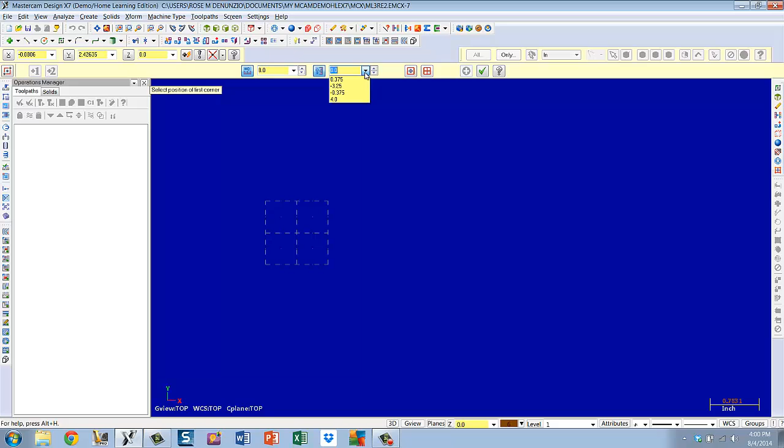So first we'll start with the large rectangle, which is 8 by negative 3.25 in the Y. So we go to our create rectangle, and it's 8 by negative 3 1/4 in the Y. Enter. Here's our phantom, and we are going to place that right on the origin as depicted in our print.

We can do a fit then, and mouse wheel it down. There's another rectangle. I would advise making it the entire distance of the part, because we can use the remainder of that distance to parallel from.

So in that sense, and this is exactly how we did it in tutorial 2, we want to create another rectangle. First I will apply this large one.

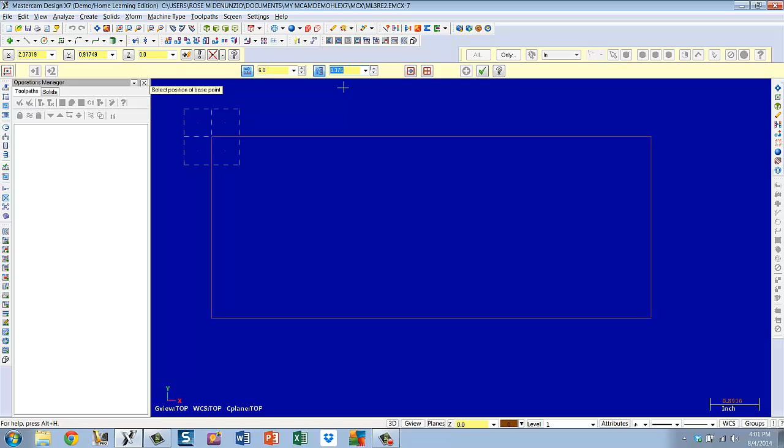My next rectangle is going to be 6 inches in length, and it's only going to be a full shaft diameter of 750, so we're going to make half of that because of our revolving. So it's going to be 375 in width, and we'll go ahead and hit enter to get that phantom. It looks right because basically it's half of our shaft.

And then I'm going to go up to fast point. We have a print dimension of 1 in the X in terms of location, and in the Y, as I instructed earlier, to go ahead and calculate the Y location of that center line, and it is negative 1.625. I wrote that right on the print.

I'll use it again when I put my hole in, and I'm going to use it for the axis to rotate my part around. So that looks good. Basically it's placed on the center line. If you just hover on these, you can see those are your center points, and that it does align with those. So that looks like it for rectangles.

I'm going to check out of that command. Now I'm going to start putting in parallel lines. I'm going to start with the vertical ones because they look like they'll give me the most pictorial value to help me build my part visually.

We're going to go to parallel lines. I am instructed to select a line. I'm going to parallel off of this line. My amount will be from print 3.625, enter, and then it says indicate the offset direction. It is this direction. I'm going to accept it, but stay in the command.

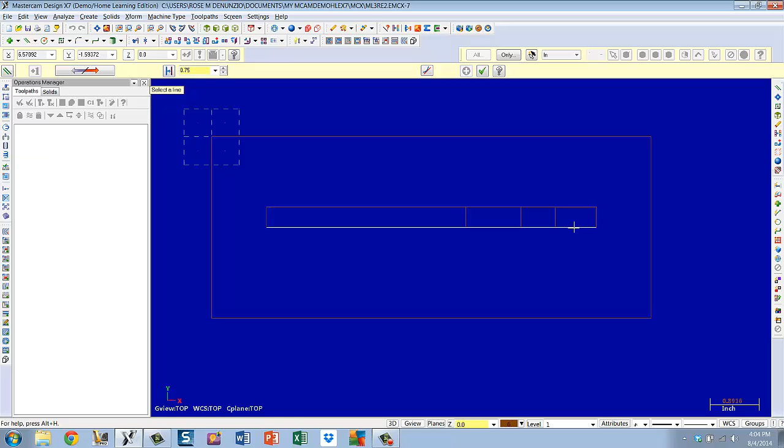It looks as though I've only got 2 of them. We're going to come off the center point of the part. That's where everything's dimensioned. My distance, if I'm going to do the head right now, it's 1 1/4 inches in diameter, but that's divided by 2.

0.625, that's 5/8. The offset direction is here. Now I just put in the edge of the head. I'm going to accept that one. And then I've got another one that is the flat shoulder.

It's 1 inch in diameter, so select the line, indicate the offset distance, which is 0.5, enter, and now indicate my offset direction. I believe that's it for parallel lines, so I'm going to exit out of that command.

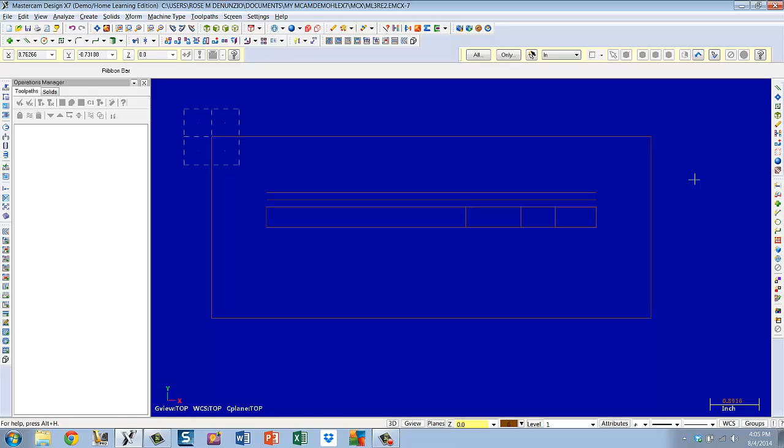Now I'm going to start to draw my part through trim and extend as much as possible at this point. You can go to the scissors. I'm just going to use the trim one entity. This will also extend, so if I say I want this line to go all the way up to here, it'll do so. This is the other end of my head, so this line needs to trim and or extend up to this line. I don't need any more of this, so I'm going to keep this much to here.

This line has nothing to do with the head, so I'm going to trim that out just so I can see it better. We'll keep this line to here for now. And we'll keep this line to here for now. So I've got my head, and then I've got my next shoulder drawn in.

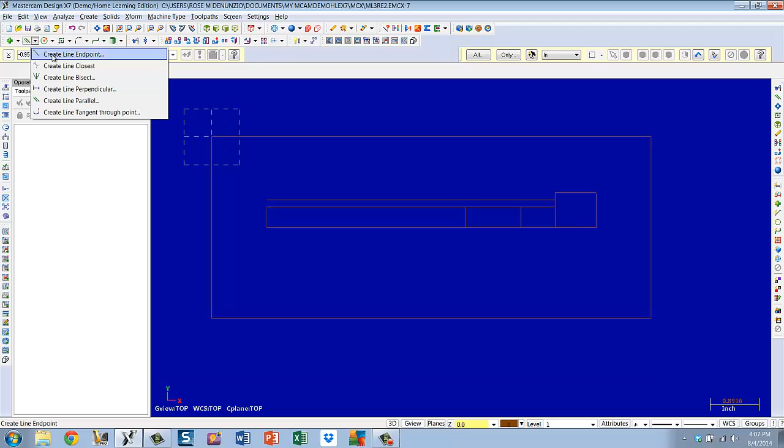At this point I may want to put my angular lines in now, so I'll check out of that and go to just create line endpoint. I'll look at that 45-degree angle I need to put in, sort of a chamfer.

Specify my first endpoint, which is here. It's not going to be tangent, horizontal, or vertical. It's going to be an angular line. 0 degrees starts at 3 o'clock, 90 degrees is at 12, 180 is at 9, and we need another 45. So 180 plus 45 is 225, enter. And all I really need to do is place it across my intersection, which should be this line.

That looks good. I'm going to apply that, but stay in the command. And I've got a 7-degree line to put in, so I'm going to change to 7 degrees, and specify my first endpoint.

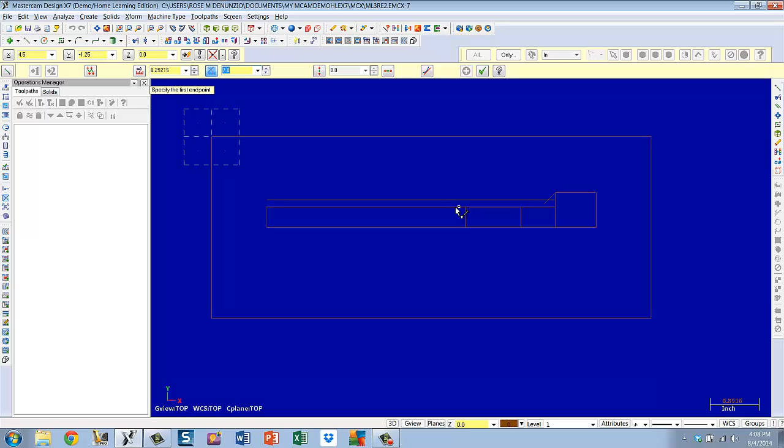If I look at my print, it's at this shoulder here. 7 degrees right off the 3 o'clock, so I'm good. All I need to do is cross my intersecting line, put my 7 back in because it didn't hold, and I'll just back it up to where I cross my intersection, which is there. And that's good for my line endpoints.

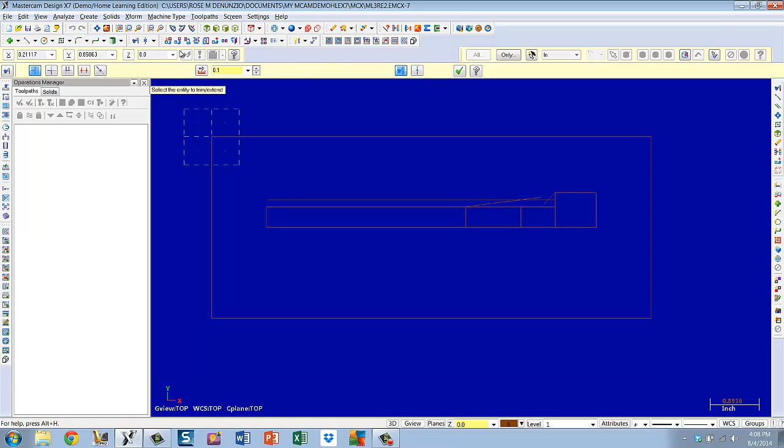Now I can trim some more. Pick the scissors. I only need the 7 degrees to go up to here. I only need this line to go to the angle line.

I want to trim this line. I want to keep this to the 7 degrees. The 45 I want to keep to this flat. I want to keep this flat to the 45. And I only need this shaft to here.

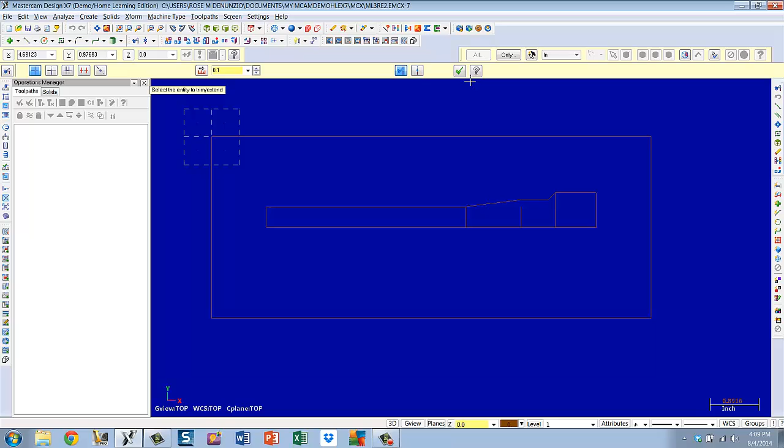That looks really good. Now I can delete all of these. You can either hit your delete button or the eraser.

And the last thing we need to do is put in our fillets, which are 0.0625 radius. So to put those in, we go to our fillet command, put in our radius 0.0625, and follow the prompt. Our drawing says we need a fillet at this corner and at this corner. Those look correct. I'm going to check out of that.

And the last piece of 2D geometry we need to put in is the hole. So we go to the Create Circle Center Point command, put in our diameter, which is 1/2 inch, enter.

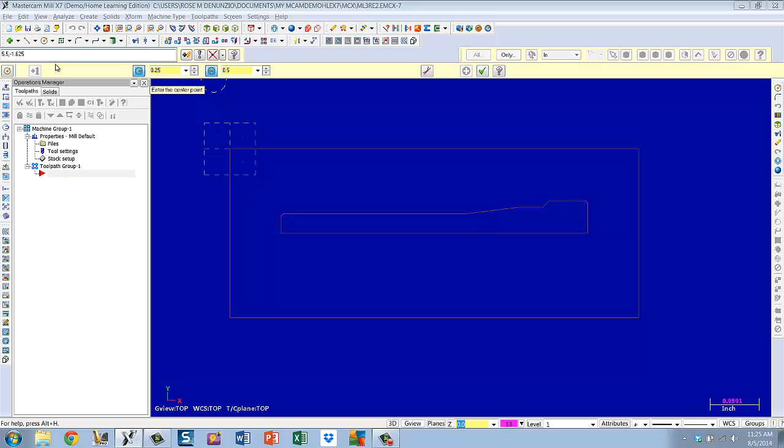We've got our phantom hole. Now we can place it through Fast Point by putting in the location. The X direction is right on the print, it's 5.5, comma, and it's right on the center line, which we've determined is negative 1.625 in the Y. Hit enter, and that hole is placed. And it looks correct according to our instructions.

So now we can go ahead and start creating surfaces and building the rest of the part from those. The first one we're going to do is the revolve.

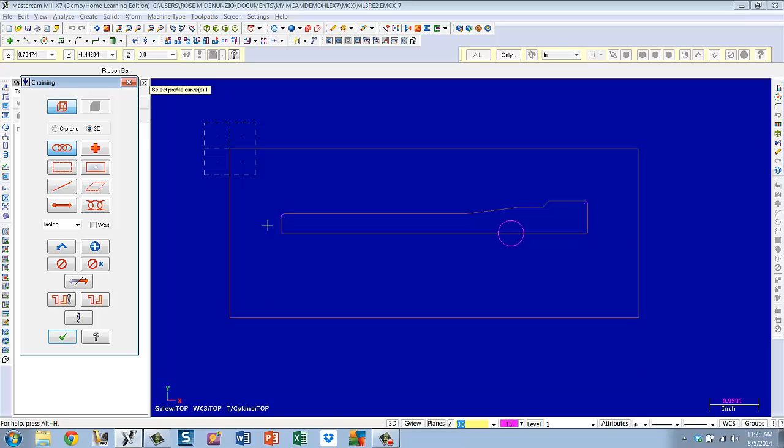Create, surface, revolved. Leave the chaining dialog box the way it is. Go up to our prompt. It says select a profile. So we will select the chain to begin here, go follow this profile, and we'll end it here, because we're not going to revolve this. This is simply our center line, and it's going to serve as an axis, which you'll see.

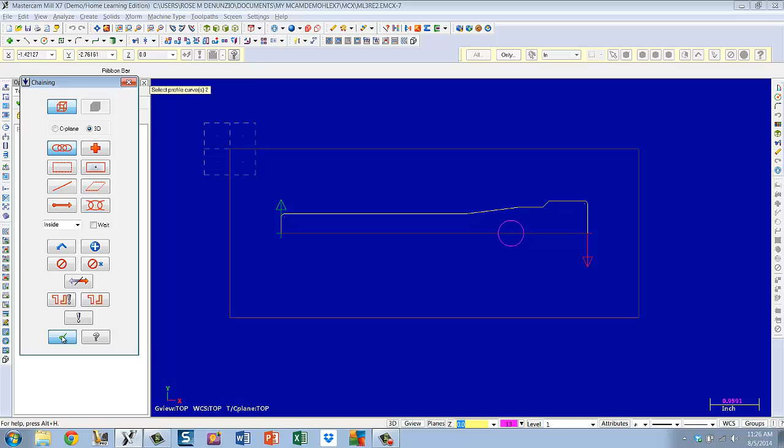So when I say OK to that profile, it says select the axis of rotation, which is this, and there we have our rotation. Go to isometric, and you'll see that it rotated the entire 360 degrees around. We really only need 180 degrees for this job. Hit enter, and it gave us the correct 180.

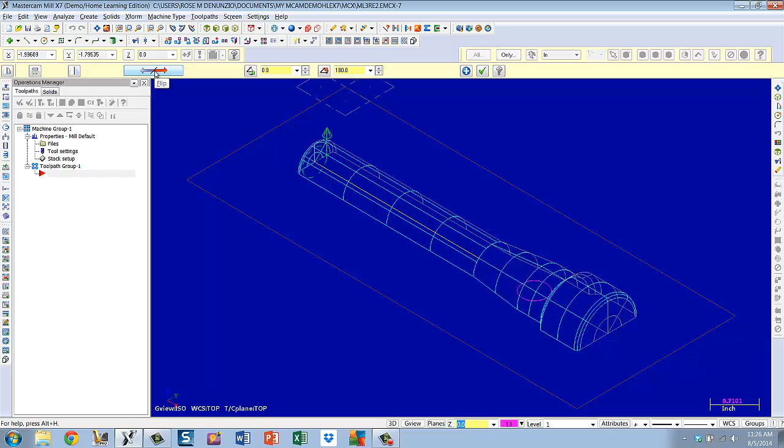I'm going to fit it. You can also use this flip button if it gave you the wrong one, but that's what we need. So now we're ready to move on to

the hole. We're going to place that hole onto the surface. So I'm going to go up to X-Form, Project. It says select entities to project. I'm going to pick this hole, hit enter or end selection. We want to move it, but we want to move it onto a surface, so we hit that icon.

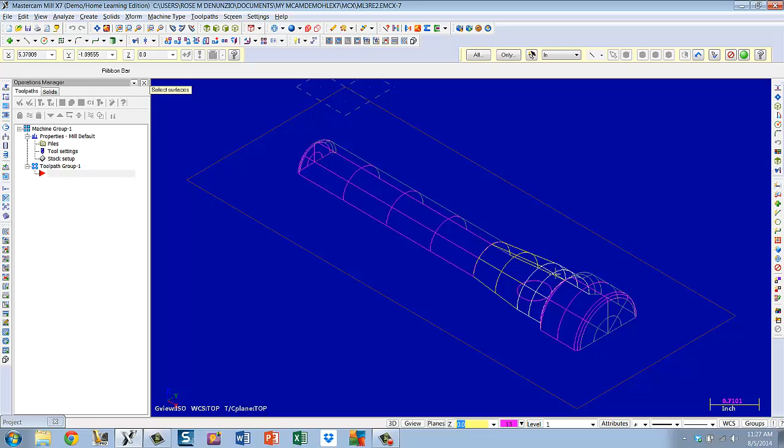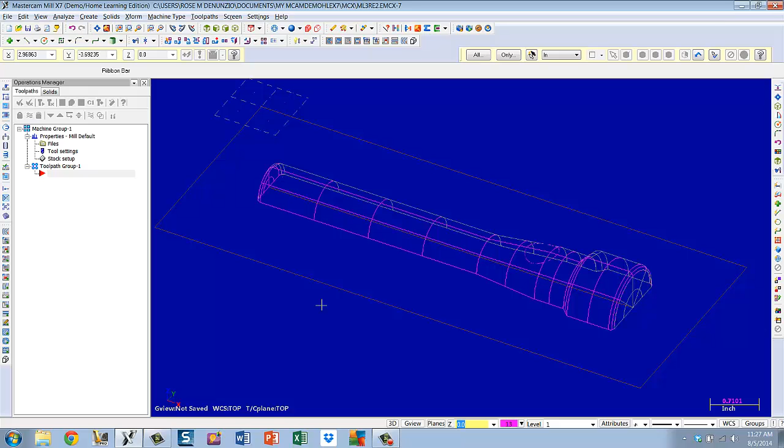Now we pick the surfaces as we are prompted. That one and that one. There's a little trick they threw us. We have two surfaces. End selection. And it looks like it projected very well. We don't want to join results because we need to use net later, and net needs the results not to be joined. It needs a minimum of 3 entities. So the rest of that box looks good. I'm going to say OK, and there's my hole projected onto the part.

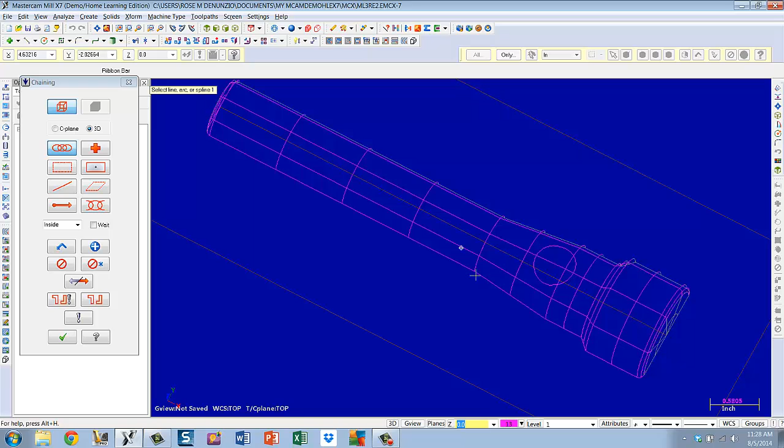Moving along with our instructions, we need to create a draft surface. Create surface, draft. We can leave chain on, but we're probably going to have 3 chains. I'm going to pick that one. Oh, it chained everything, but there's still 3 elements in there. Say OK.

According to the detailed drawing on the print, the depth is 0.125. Enter. The direction looks good. At an angle of 45 degrees, hit enter, and that angle looks good as well. Say OK. Anytime we do a draft, we need to put some edges on it.

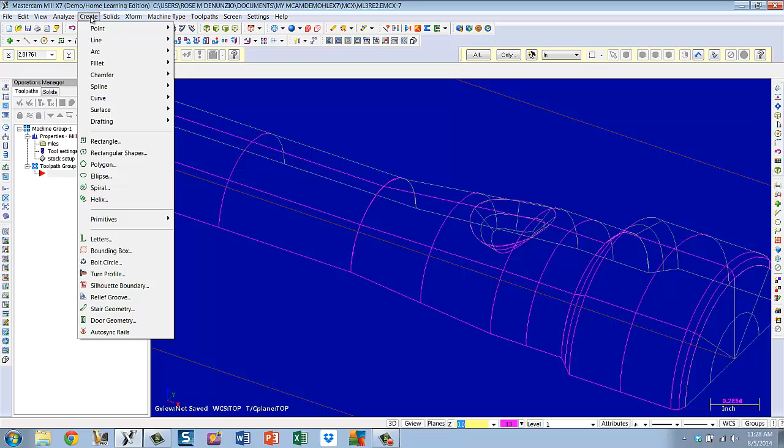To do that, we go to Create, Curve on Edge. I'm going to roll up on this, pivot it, roll it up some more. You can also use the zoom target command like we did in tutorial 2 if you like.

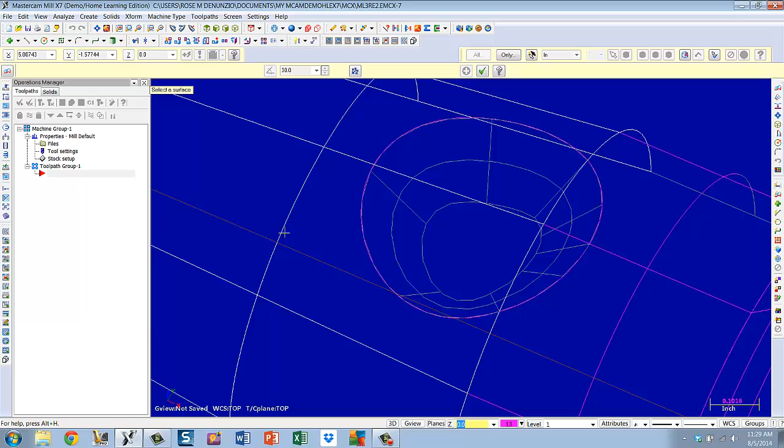So it's prompting me to select a surface. I'm going to pick this surface. When you hover over them and they light up, then you can pick them. Now without holding any buttons down, I'm going to slide the mouse down to the edge that I want and then click. See, my edge was created. We need to accept that one.

We need to go to this surface, pick it, slide down freehand, and click. There's the edge created there. Accept that or apply it. Select a surface. This is the third one. Pick the surface, slide down, and click. And those are all of our edges that we need. We can check out of that command.

Now we have something on which to place a net, which is another type of surface. This would be a good time to change colors. You can change colors on every surface if you like as well. It's probably a good idea because you can use it for masking and picking things, and also visual reasons.

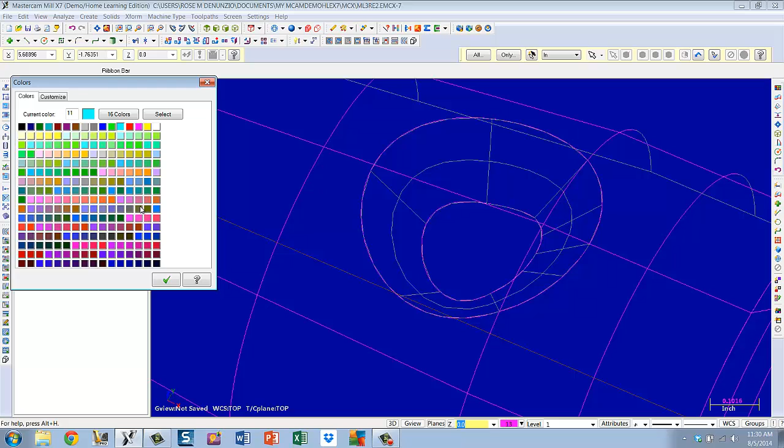I'm going to go to blue, and I'm going to create a new surface using the net command. Here I need to go to elements because it needs 3. Now you could use chain if you had a lot of chains, but because I need 3, I need to go to single, 3 minimum that is.

Select chain, pick this surface edge we created. I like the clockwise direction. Select another one. It's this little edge here we just created. I'm going to reverse the direction. They should all at least be going the same way. And then I've got a little surface edge I put in right here. Reverse it. And those are my 3 edges.

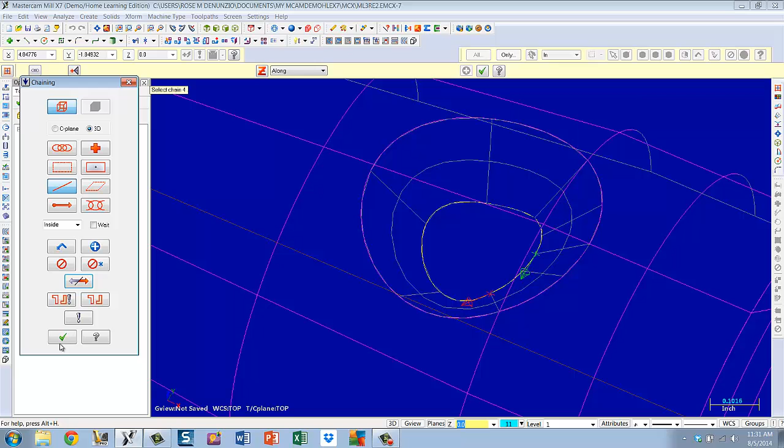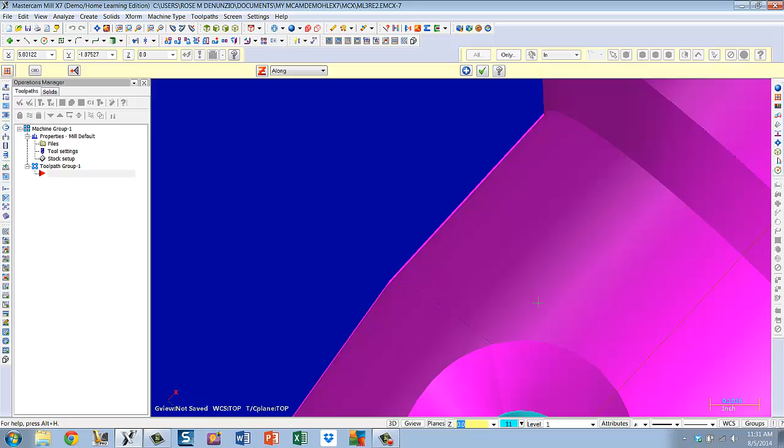And it created the net. And the net looks correct according to our instructions. I'll shade it, but yeah, it doesn't show up because we haven't created a demarcation from the Revolve surface yet, but it looks good that way. So now I will do a fit

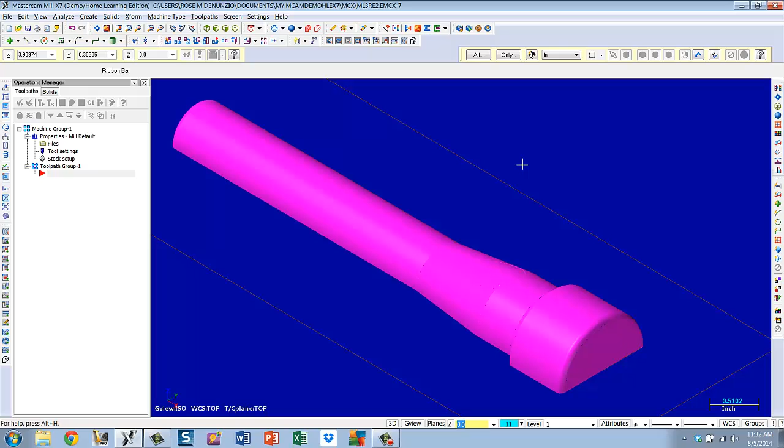and clear colors. Okay, so now we need to put in that fillet on that hole. Go back to wireframe. You can also do alternate S. I'm going to move it around so I can get in there.

So to put the fillet in, I go back up to Create, Surface, Fillet, 2 surfaces, and carefully read your prompts. It wants them in sets before we hit End Selection or Enter.

So my first set includes this surface, and that one, and that one. Now hit Enter. The second set of surfaces includes this surface and this surface. Hit Enter.

My fillet radius is 0.0625 per the detail view on the print. So that's correct. Let's take a look. No fillets found. Okay, we have to play with the arrows.

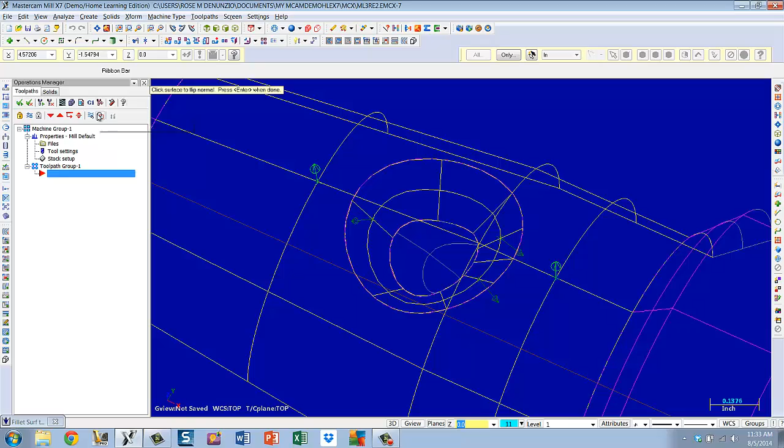Hit the flip normal button. I only want to change one set of arrows at a time. I'm going to start with the easiest one and flip the Revolve surfaces. Hit Enter. There it worked. Generated our radius.

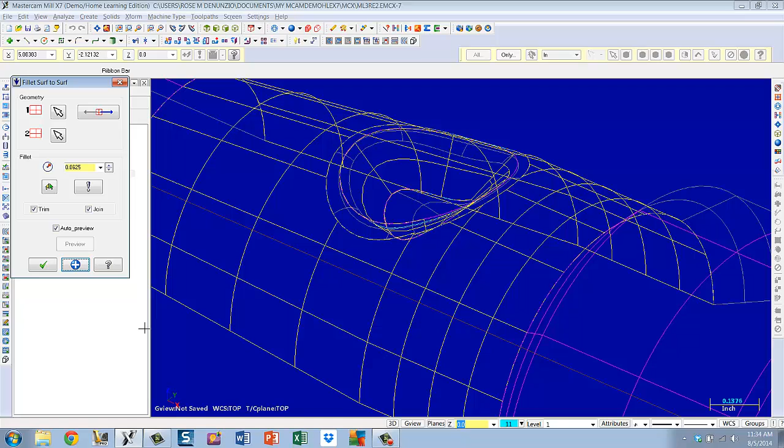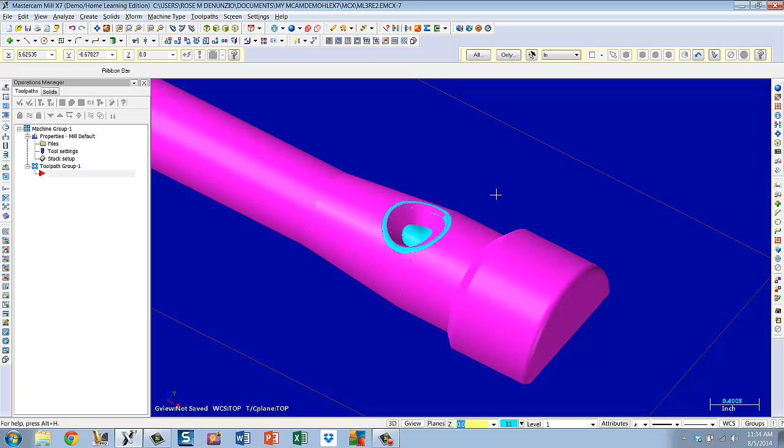So we will accept that. And I'm going to shade it just to see what we have. It looks good. It's a little bit visually off, but I'm not going to fuss about that until I see how it cuts. If it doesn't cut right, then we have a problem, but I can't imagine anything going wrong here. Looks like we did everything pretty well. Now we can put in our flat boundary surface.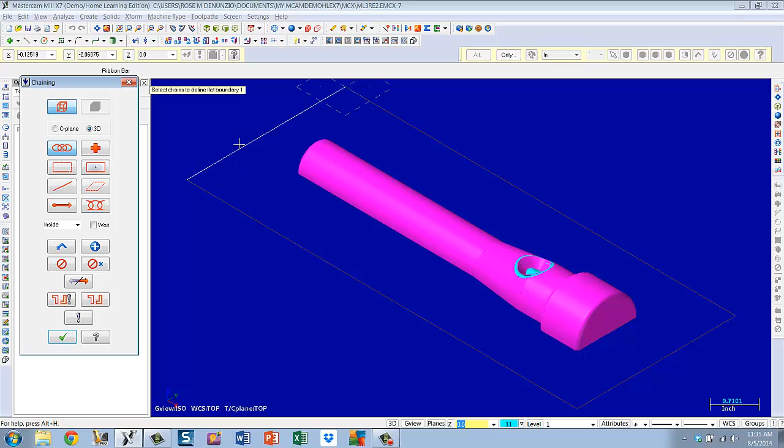Isometric and fit. Create surface, flat boundary. Chaining dialog box, pick this chain. Say OK, and accept it.

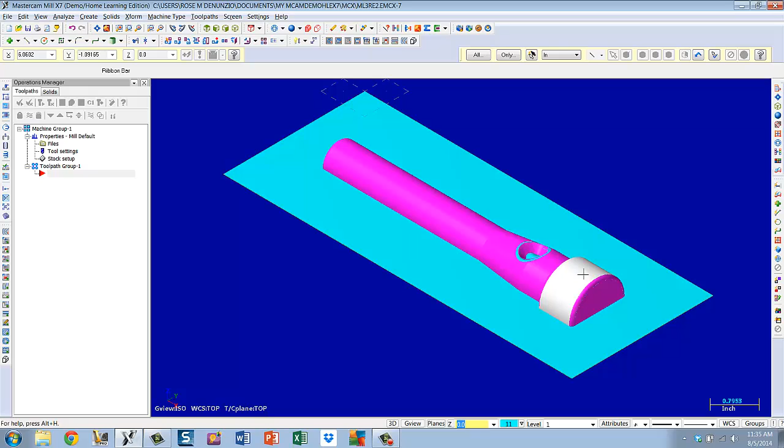And that's our part. We do need a bounding box, however, so that we can place the top of the part, like the tangent point of this head, onto a 0 position in the z-axis. So our bounding box helps us do that. It's kind of like when you buy a randomly shaped item and they give you the overall dimensions of length, width, and height. That's kind of what a bounding box does.

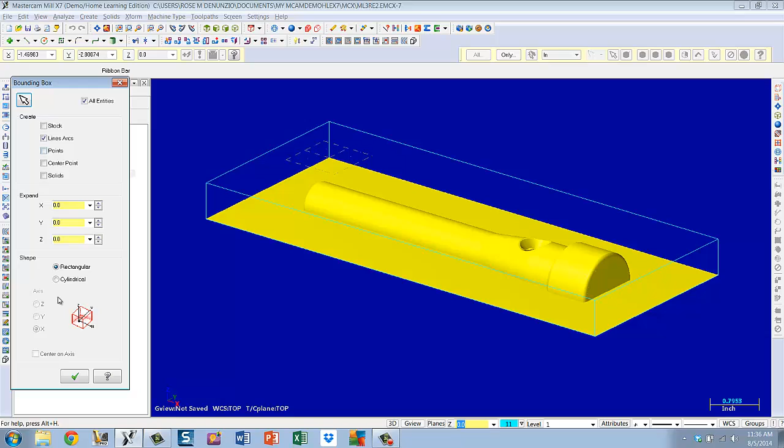So let's create one. It just bounds every extent of the part that it reaches. Make sure you don't have points selected here, and that's okay. So now we've got a bounding box, and from that bounding box we can place our part on Z0 now.

And we just go to X-Form, move to origin, and pick this intersection. And we're down on Z0. When we create our stock, then we will add 200 thousandths to the Z top, and the machine will know that that's there for when it tries to do rapid and start its feeds.

So it's time to pick a machine and set up some stock and cut this part. Having picked our standard default machine, looking at tool settings, this is job number 4. All of these settings are the same old standard.

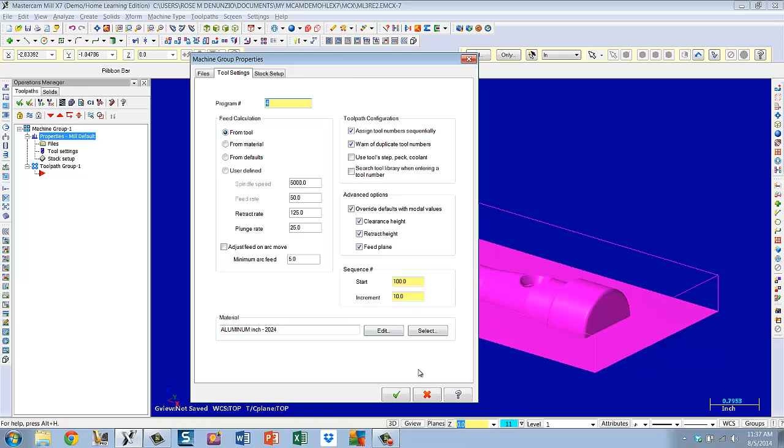Set up our stock. We pick our dimensions off the print, which is y 3.25, x 8, and z is 1.25, which is shown on the side view. And then here's where we add our 200 thousandths to the z, and this is where we tell the machine that it's there.

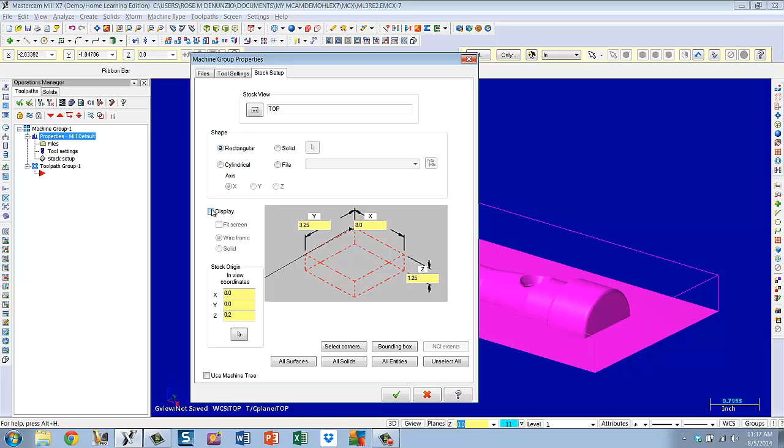We want to turn on the wireframe so we can make sure it looks okay. Say OK. There's our stock, and that's what the machine knows is there. So we can start creating toolpaths.

The first one would be the surface rough pocket. Toolpaths, surface rough, pocket. Put your name in here, and this is my information that tells me what job it is. And that will show up in the program, just like the verbiage that you put in with the tool in terms of what we're doing.

So now we select the drive surface, which is the whole mask. We can either box it or pick the QM. And selection, we do need a containment boundary here because it knows not to go onto the shaft, but it doesn't know that it doesn't need to go completely around the world. So we need to contain it within that cube.

And so we just pick—you can't select stock—so we pick our 2D chain here, and say OK. And that's good. We don't need anything else to go with that.

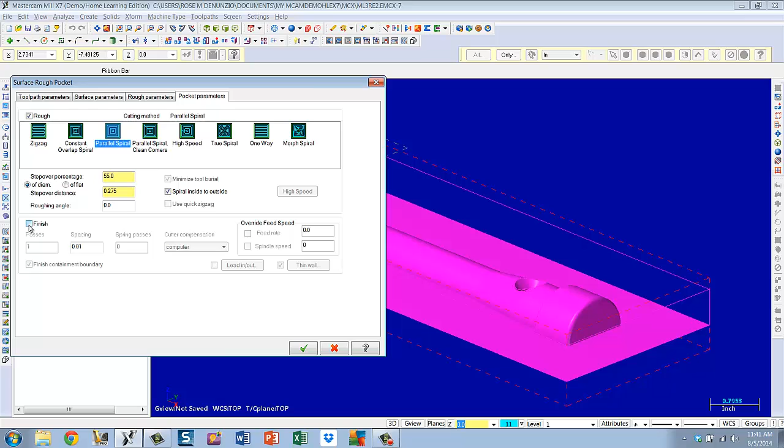Okay, backplot. Fit, isometric, and run it.

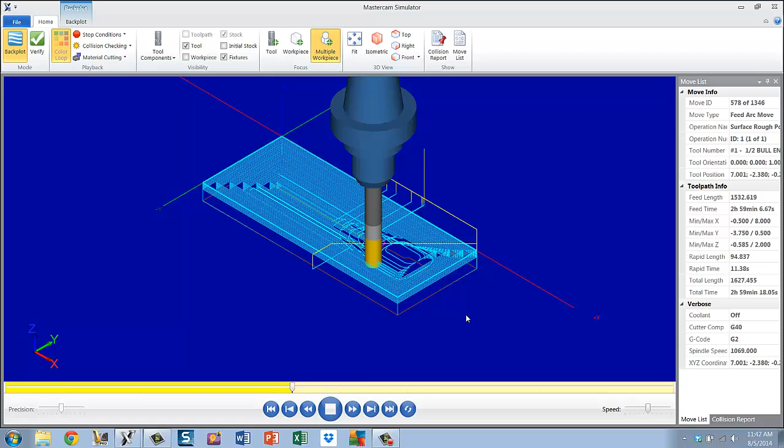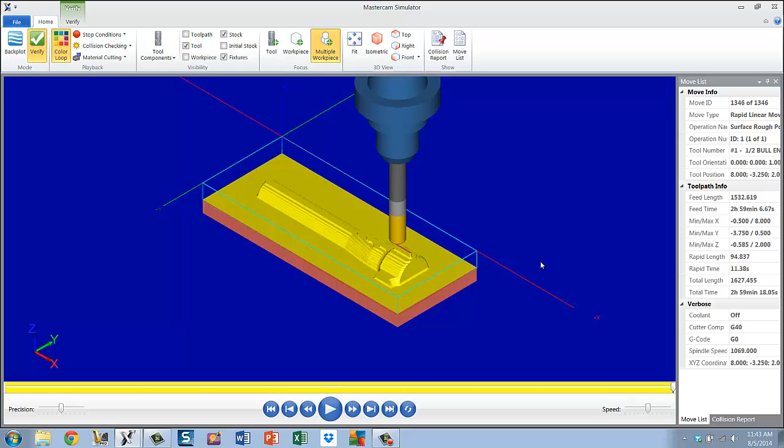Geometrically everything looked good, and I don't see me cutting a lot of air, but I'm going to verify it and step it through just to make sure. Not a lot of air being cut there, so we can go ahead and keep that operation. It looks good.

Close that window, clear colors. Looking at page 176, our next operation is to finish the part using a surface finish parallel toolpath. So we go up to Toolpaths, surface, finish, parallel.

It's asking us to select a drive surface. That would pretty much be everything, so we'll use the QM surfaces and selection. We don't need a containment boundary on this, so we can click OK.

We're instructed to use a 1/4 inch ball end mill. Because I practiced, these are already available to me, and we're going to say finish the part. Move on to surface parameters. We're not going to leave any stock. These are going to be set the usual way, so we can skip right over that one.

Now the finish parallel parameters are described on page 159. We are instructed to use a total tolerance of 1,000th, maximum step over of 10 thousandths, a machining angle of 45 degrees, and a cutting method of zigzag.

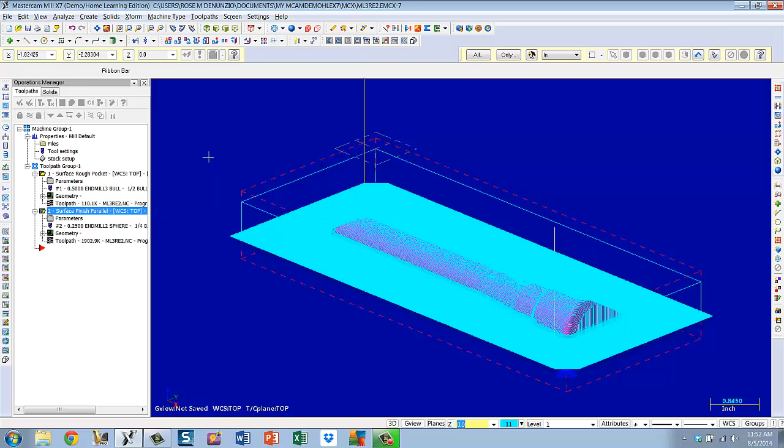At this point, I think I'm going to select all. You can see only this one's selected, but I need to have it roughed out before I can really see, so I'm going to select all and go straight to verify.

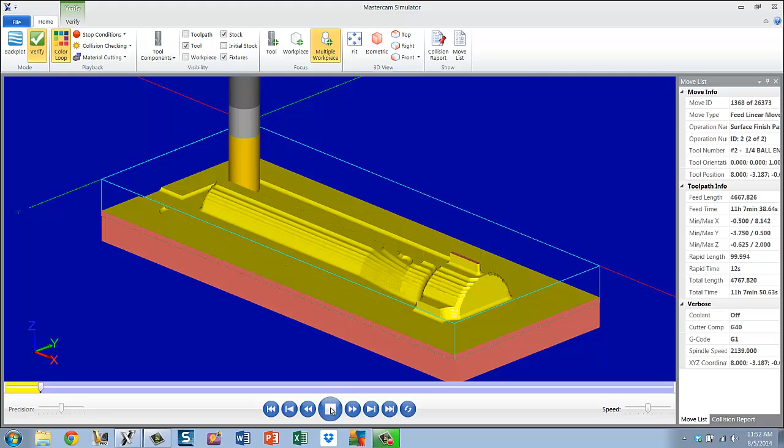And run it, because at this point I want to see the result. I can speed it up. See it cutting on a 45 angle, and then it's going off the part by 0.2 as well. That's the result I want according to my instructions on page 176. And at this point we really just need to pick out the corners because we used a 1/4 inch end mill on that and it can only get so close.

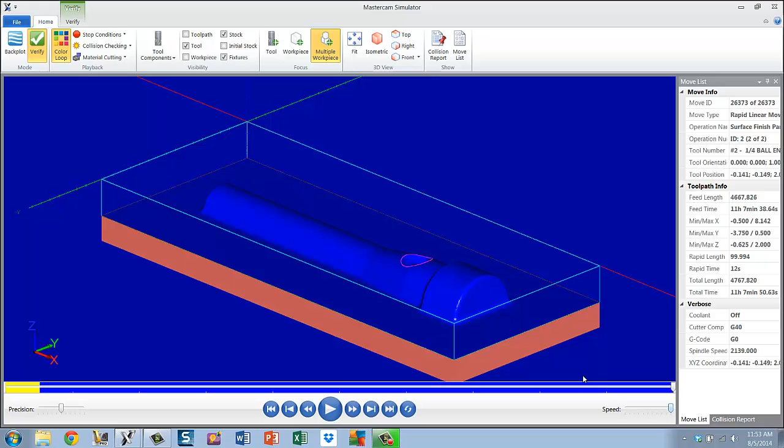Close this window. Toolpaths, surface finish, pencil. Select a drive surface. We can mask the whole thing. I'm going to show you how the box works as well.

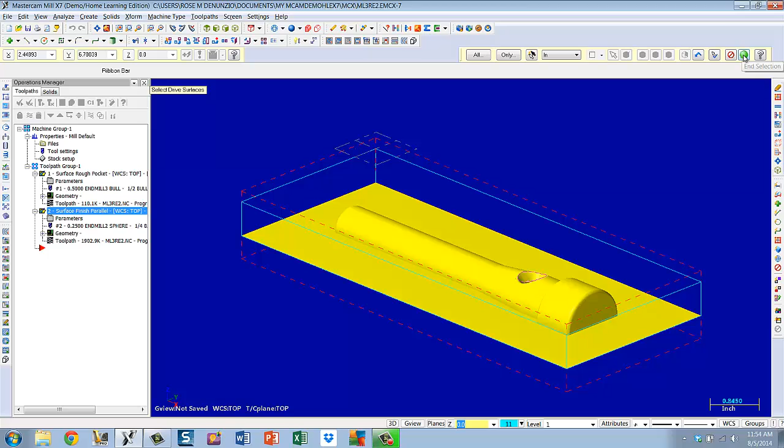We selected everything. End selection. No containment boundary on this, so just say OK. We're instructed to use the 1/16-inch ball end mill, and we're going to finish the corners, the sharp corners.

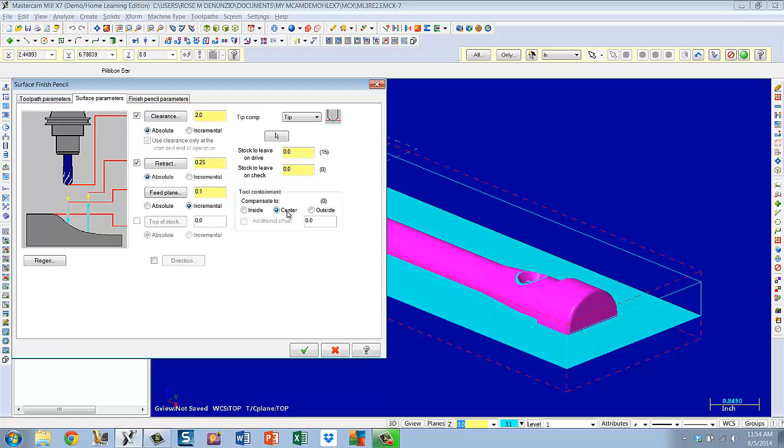Tool number 3, everything looks good. Our surface parameters are the standards. We're not leaving any stock. We'll leave it on center in terms of the machine's calculations. And then we need to do the finish pencil parameters. These are defined on page 167.

Total tolerance is 1,000th. Parallel passes, meaning we don't want to take it all off in one cut, so we're going to do it in 4 passes of, and this is in your instructions, 10 thousandths. Enable negative and positive motion along surface. That allows it to cut while it's feeding in or approaching.

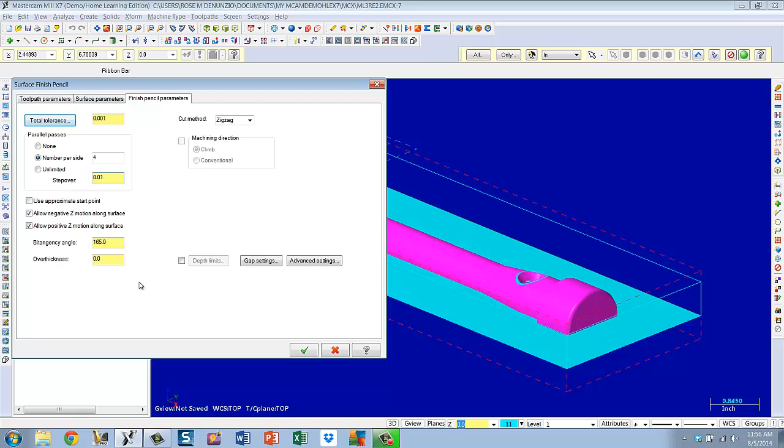If necessary, it's a little more efficient. We want the zigzag cutting method and a bitangency angle of 165 and an over thickness of 0. Again, these are defined on page 167 and I really can't explain them at this point myself. Say OK.

Select all, verify. Here's our 3 operations: the rough pocket, the finish, and the pencil.

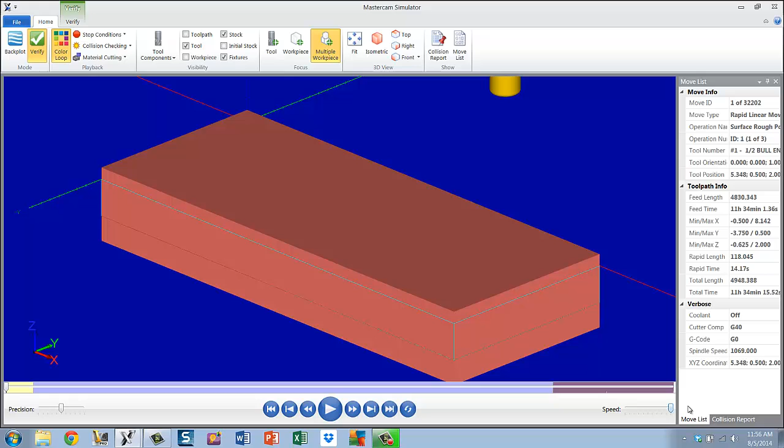I'm going to leave it on fast because this is going to take a while. I mean, if we ran it slowly, there are so many lines of code here. That is a good looking part.

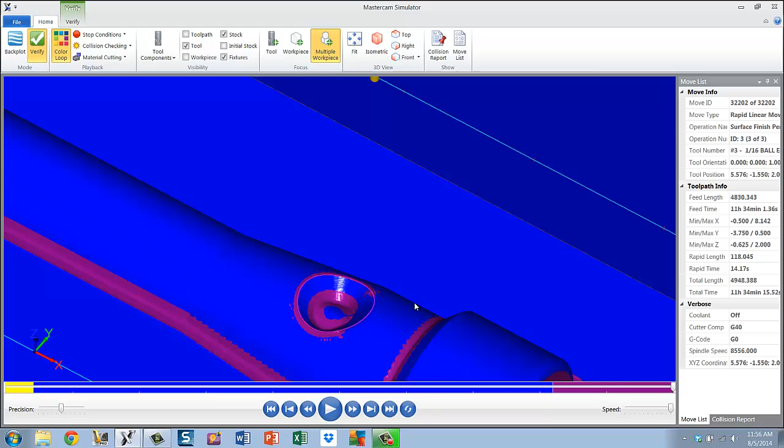See, that's just a visual deal there, nothing to worry about. So you get out of that. Look at our part this way. Everything looks good. You can turn it into me exactly like this.

I'm going to go through these operations and check all your forms and make sure they're filled out correctly. And I will run the verify slower so I can make sure it's cutting the way we instructed it to, per the instructions in the text. So good luck.